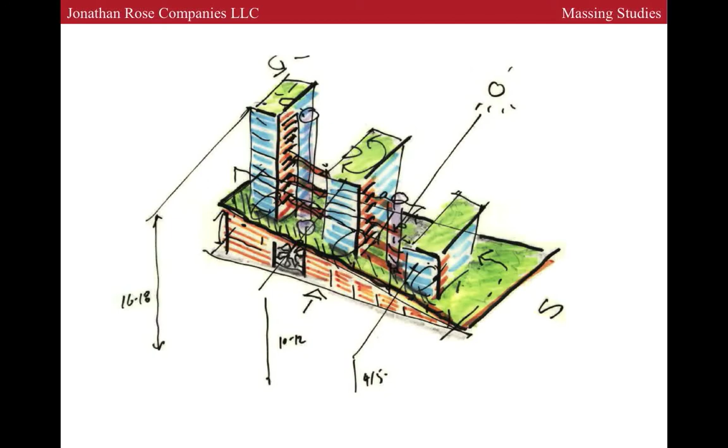We also really believed in growing food, so we thought we would have as many green roofs as possible. The first scheme was this one, kind of going taller in the north and shorter in the south, a series of standard affordable housing buildings. So that was idea number one.

Idea number two, we said let's connect these. We were also proposing not only a mix of incomes but a mix of tenure types. This project is about two-thirds rental, one-third co-ops and ownership. So we began to say let's put the rental in the high rise and create a courtyard, almost like a sub-community of co-ops, which are more focused towards live-work.

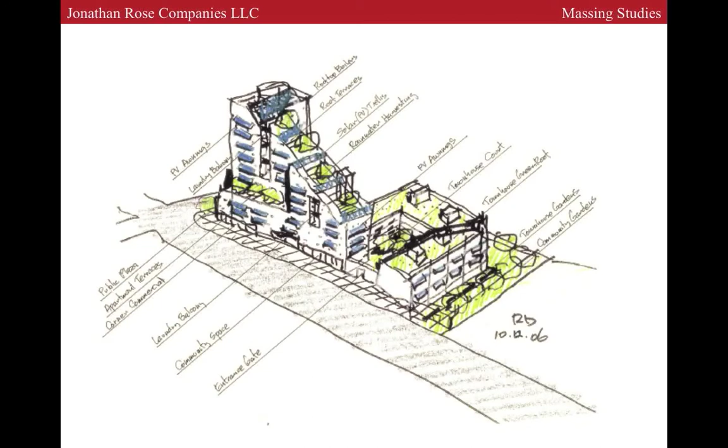This is the next idea. You're beginning to see the big theme of descending roofs and the lower rise piece. But what happens here is there's a disconnection between the courtyard in front and the courtyard behind on the left. The main street is the street you're looking at, and you have this gap created along the street.

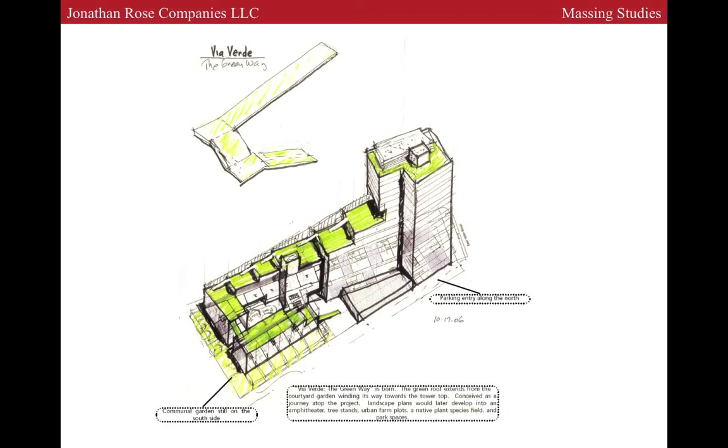So then the next iteration was this, which is close to where we've ended up, but think of it as massing, not the actual articulation of the building. This is not the final scheme, but much closer to it. You see a tall tower in the north and a series of roofs stepping down, and as it gets lower, it leads into an amphitheater, with one courtyard tucked inside on the left and another on the right.

Here we are now in the final roof scheme, where we really began to landscape and plan the roof. I have a theory that human nature and human culture, if you look at how cities have been built from the Neolithic to now, move from the most private spaces to public spaces.

If you think about the classic Arab town, a very dense town in the Medinas, you'd have the family gathered around a very small courtyard—that's private. Then there'd be a semi-private space, like an alley, and a street that becomes more public, and a town square that becomes the most public. So in all our projects we try to do that, moving from private to public.

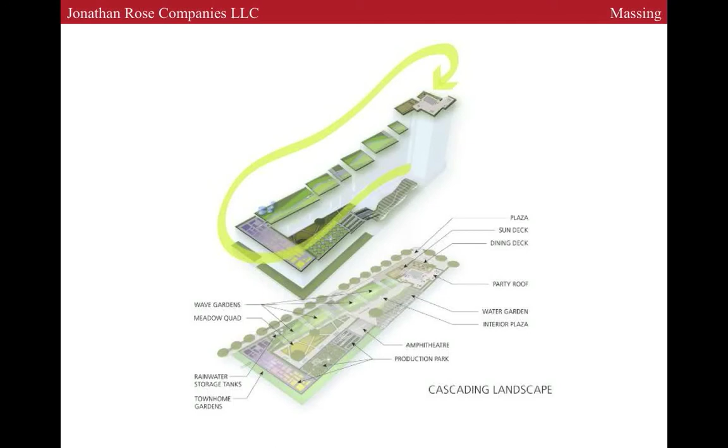Here's a more articulated version. What we really try to do is have a senior garden, meditation garden, yoga and exercise garden at the very top. It moves more and more into the public realm with community gardens, an orchard, and it ends in an amphitheater.

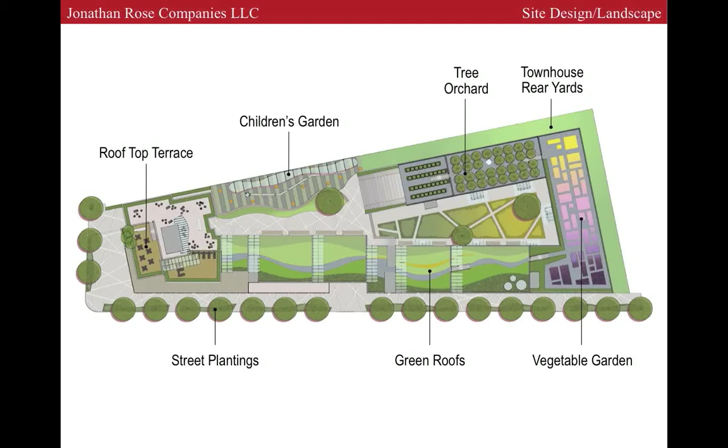So from roof to roof? Interestingly, in the original concept you could, but our not-for-profit property partner in the end said it becomes unmanageable—management of a roof in a low-income community is a very serious issue. So you do not go from roof to roof now, except through the lower garden, orchards, and amphitheater, where you still can.

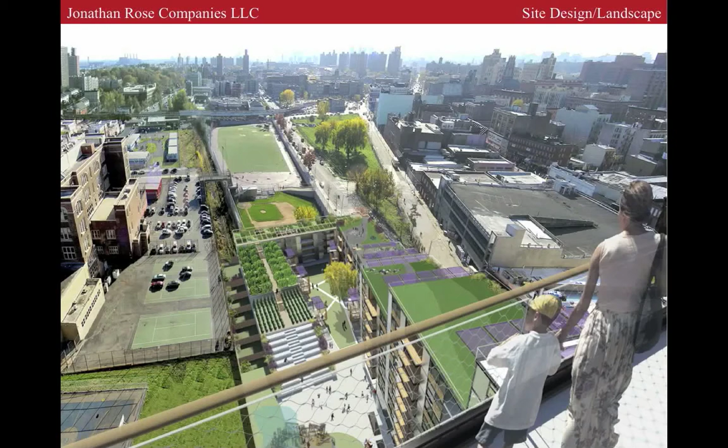Normally in these kinds of projects, you put the health club or community facilities in the basement. But here we put it on the 7th floor, up here so that people really got daylight. This is the recreation, the health club, and then there's the whole yoga meditation area outside.

You'll also see in this original scheme that the solar was attached to the southern facade of the buildings. That was the original concept. As we worked with our solar consultant, we then moved it, and the solar is now actually horizontal and forms sunshades throughout the project. So here's a scheme of how it's organized.

On the far left is rental apartments. When you get to the middle, you're going to see this in more detail. The middle income co-ops move into a duplex live-work format, and then the townhouses.

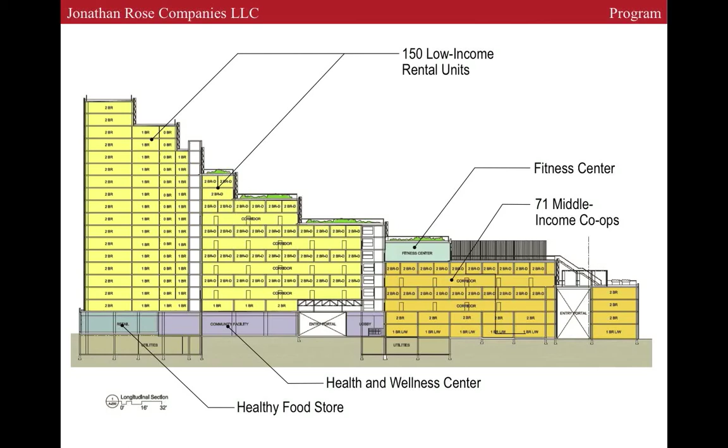One thing is we're using a rain screen facade. The function of a facade in a building, the skin of a building, there's an aesthetics function—you want it to look good. There's a rain screen function. In particularly higher buildings, rain is a real issue because it's wind blown. When you have 70-mile-an-hour winds blowing, they can actually blow rain through bricks, etc.

Typically in brick buildings, the way they're built is what's called cavity wall construction. There's the brick, there's a gap or the cavity, and then another layer inside, and the rain actually blows through the brick into the cavity and then drops down, and you have weep holes and it weeps out. So there's a whole system for how that works.

So a facade has to have a rain screen, it has to have insulation, it has to have structure to help hold up the building, all those different things. This is a European system that we barely used in America before, in which the facade comes in with a panel, and that exterior layer's sole function is to be the rain screen, not insulation, not structure. Those other functions take place in other ways in the facade.

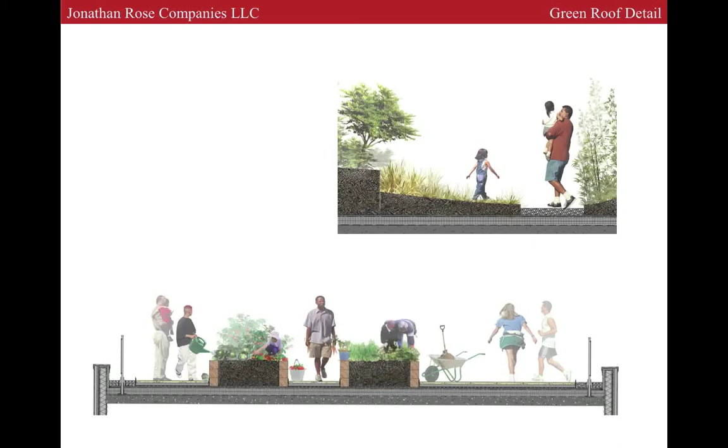The roof also—there was a lot of design as to how you design the roof to be handicapped accessible. What height do we need, how much can kids and families actually touch dirt and touch nature, which I think is really important.

So the unit is a kind of an L, so it's got half the lower floor and the upper floor, and they interlock with each other. It's very efficient because you eliminate a corridor every other floor, which improves a building's net to gross ratio—meaning that for the same amount of material in terms of construction, you're getting more occupied area. So from an efficiency point of view, both real estate efficiency and material efficiency, you're increasing your efficiency.

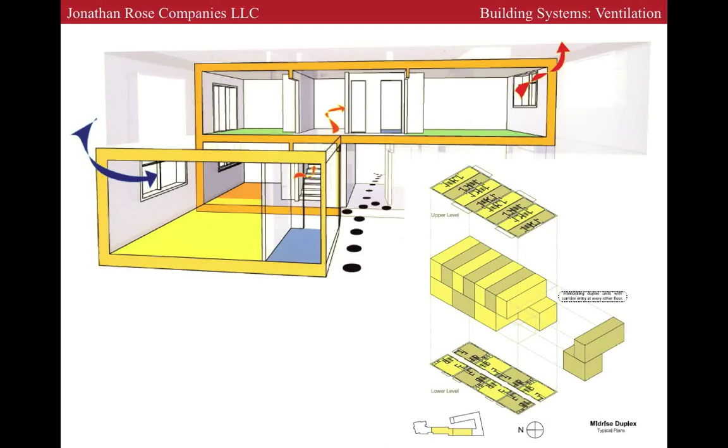Energy, water efficiency, toilets and fixtures, Energy Star appliances, lighting, cogeneration, combined heat and power for some, and heat recovery from exhaust air.

It's another thing we do in all our projects. When you make really tight buildings, the air becomes unhealthy, so you have to circulate or you get mold and stuff like that. You have to keep circulating air, but you do an air-to-air heat exchanger so you can reuse that heat.

High efficiency condensing boilers, bi-level lighting. Bi-level lighting means in the corridors, when people are not there, or the fire stairs, what we really like to do is have occupancy sensors and turn them off, but the building code requires us just to be able to turn half of them off.

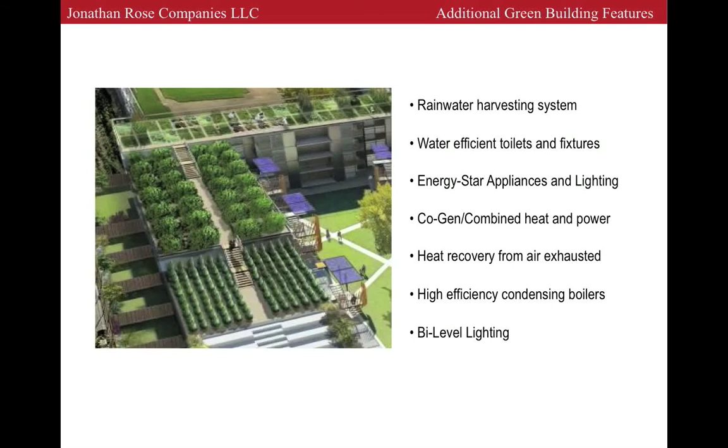Natural cross ventilation, roof gardens, passive and active recreation areas, on-site fitness centers, so a whole series of focuses on health. We leased almost all the ground floor to Montefiore for a local health clinic, so health is on site, and one of the things we're doing is a health assessment of every resident before they move into the building, and then health tracking with the New York City Department of Health.

We're trying to prove that living in a green building improves people's health. The rest of the retail space is probably going to be leased to a Korean deli. Healthy interior materials, so no VOC or low VOC materials, active promotion of bicycle use, etc.

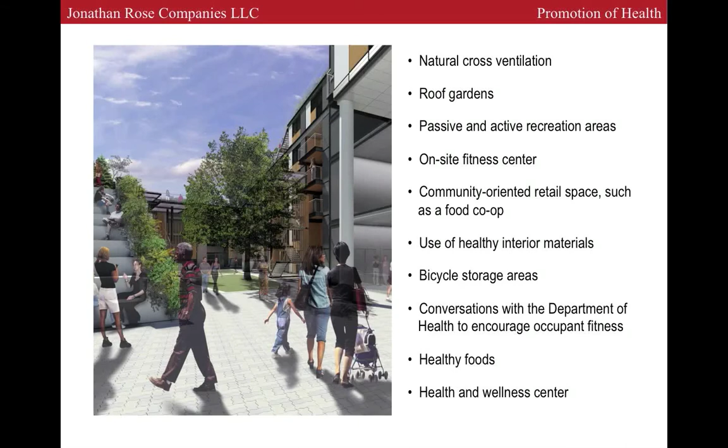Energy savings, so we think this building is going to save 37.3% over a baseline. Some of you know I've been very active in a program called Climate, Mind, and Behavior.

What we're learning is that you can make a base building very energy efficient. For example, when you turn off all the lights in the corridors during the day when people aren't there, that's a savings. But more and more we are seeing that energy use is not in the building but in the people. For example, if people put their TV box on a power switch and turn it off when they left and only turn it on when they needed it, you'd see lower energy use.

So we're designing for future climate change, not only today's temperatures, but future temperatures, for low-income people. So what do we do?